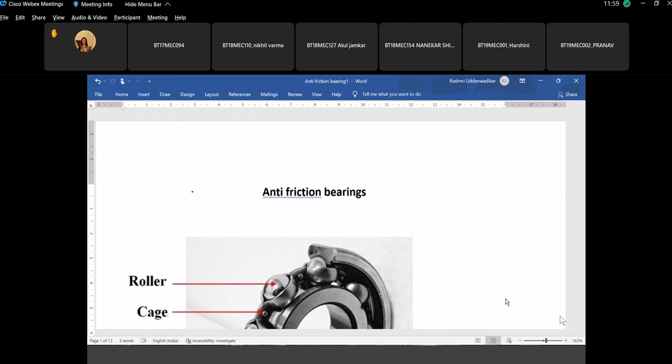My slides are visible and this image is clearly visible to you all, right? Yes or no? Okay, so you can see an assembly of a ball bearing where there's an inner race and then there's an outer race.

Between these two races, there are rollers, and the rollers are not free to move in all possible directions, but are only allowed to roll. The two balls or rollers are not in direct contact with each other, but instead they are placed inside the cage, as you can see. This cage is also known as a separator, which avoids the contact of ball to ball or roller to roller.

All these rollers have a mirror finish, so they are highly smooth with a very high level of surface finish. We call this mirror surface finish. Since we are looking for absolutely no friction, which is not possible, but minimum possible friction, we also call these bearings anti-friction bearings.

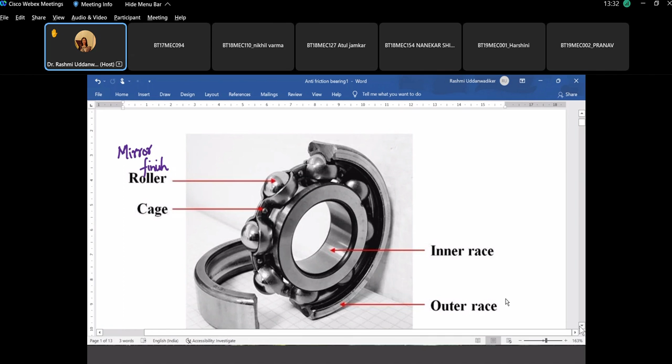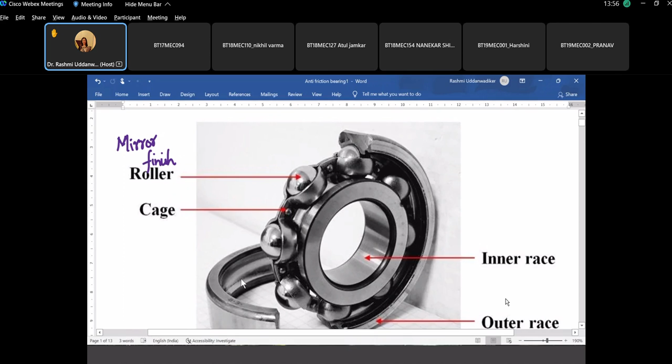Are these grooves visible to you, on the inner surface of the outer race and likewise the outer surface of the inner race? What is the shape of the groove that you can see? So here these grooves are in the form of an arch, curvilinear, or in the form of a curve.

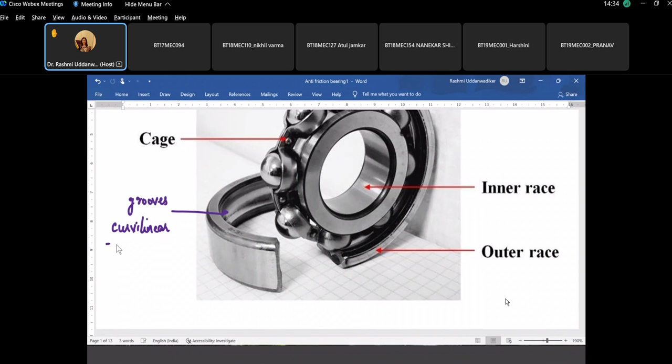It's not a flat surface. And because of the curvilinear grooves, it is allowing a larger contact area, permitting a larger area of contact. What happens when the area of contact improves or increases? Why are we trying to increase this contact area here?

To decrease the stress. Since the strength is known, this is the maximum stress it can withstand, so this will permit larger loads to be transferred. This permits larger or heavier loads because the stress would be less. For the same amount of load, if the area of contact is small, then the stresses would be too high.

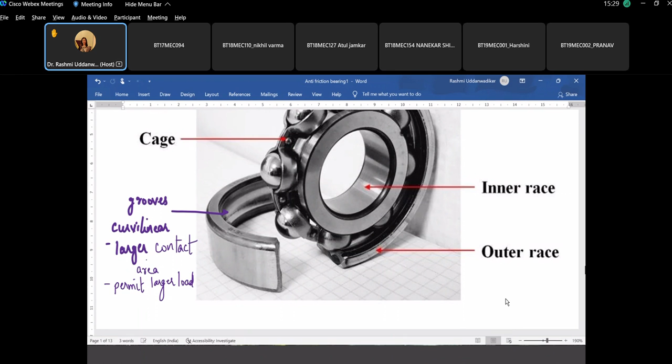The radius of the groove is different from the radius of the ball, and which one do you think would be greater? So yes, you are right, the radius of the groove is larger than the radius of the ball. And the reason, why so?

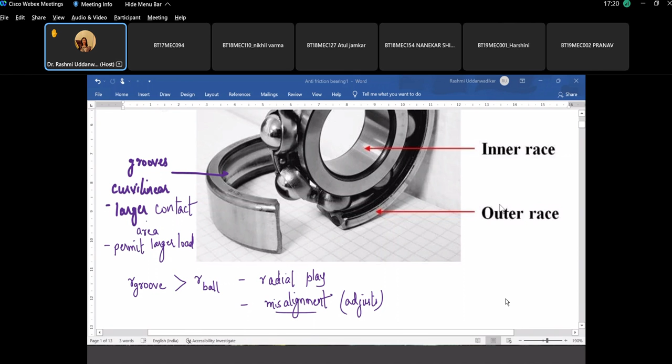Yes, it is allowing little clearance, allowing for some play, so there is a radial play, and the ball can roll. This is allowing a little amount of radial play. Plus, the outer race is in contact with one rotating part, and the inner race is in contact with another shaft. So if there is a slight amount of misalignment, this play or difference between the radii will take into account that little amount of misalignment. So it accounts for or adjusts the misalignment between the two rotating parts. That is another advantage of having a larger groove radius as compared to the radius of the ball.

As shown in the figure, this is the simplest kind of deep groove ball bearing. Now we are talking about various types of ball bearing, roller bearing, and then we'll compare a journal bearing and a ball bearing, and what are the advantages of one over the other.

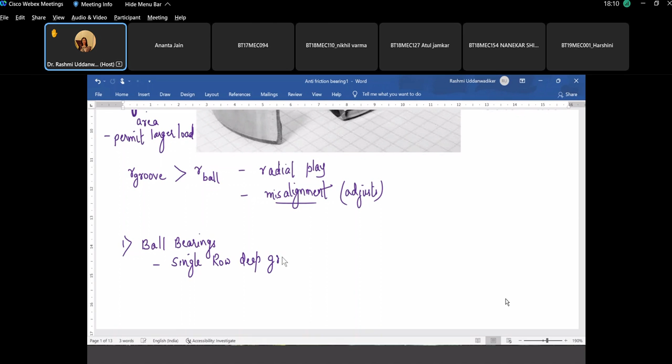So there are different types of ball bearing. The most commonly used, shown in the picture above, is a single row deep groove ball bearing. We'll again be referring to the design data books because a lot of data is given in the PSG design data book for different types of ball bearing. The most commonly used ball bearing is normally designed to take radial loads, load coming along the radius of the shaft. It can also take axial load to some extent, but only when these axial loads are smaller than the radial load.

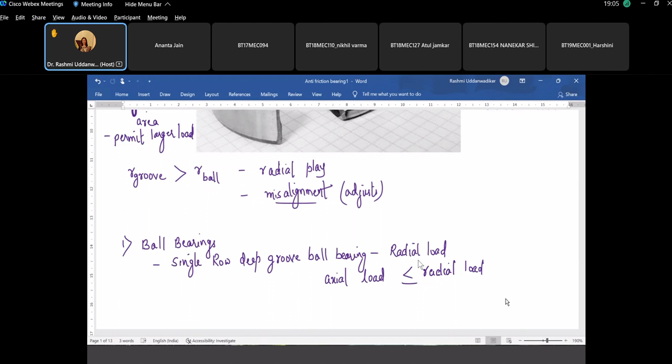If they're equal to radial load, or the axial load is greater than the radial load, then we have to go for other type of ball bearing. But this single row deep groove ball bearing, as shown in this image, is used essentially for radial loads.

What if the axial load is greater than the radial load? If the axial load happens to be greater than or equal to radial load, then we go for a different type of ball bearing known as angular contact ball bearing.

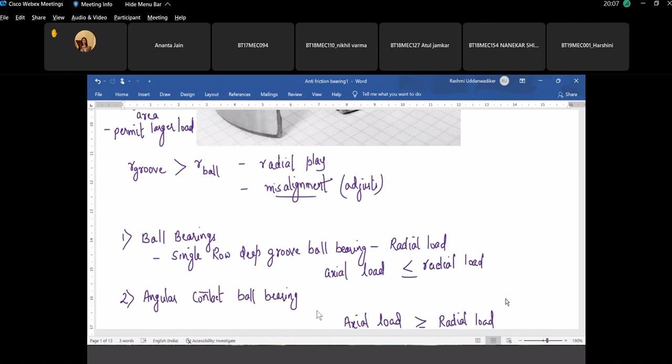So these are designed for larger axial loads. Why so? It is because of its design. Yes, I have the image. This is the angular contact ball bearing.

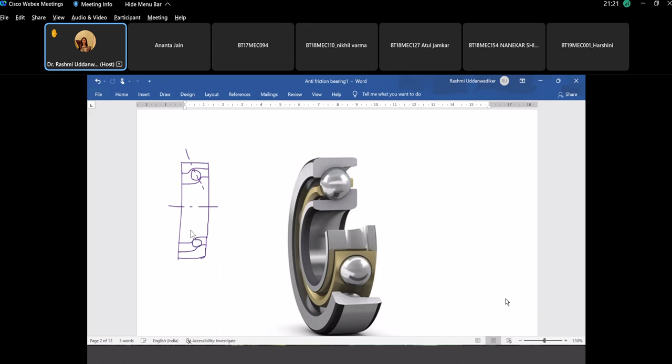And how is this different? If I draw a side view of this bearing, the grooves are cut like this, and the ball is placed here, and the line of contact is something like this. Similarly, on the other side again, the grooves are like this. This is the line of contact, here you can see this. This is known as the line of contact.

So it's because of its design that this can take the axial load and this can take the radial load both, this being the line of contact. So the resultant happens to be somewhere close to this line of contact, because of which it can sustain both kinds of load.

Now depending upon our assembly, we have to select the type of bearing. If it is only radial load, pure radial load, we can go with deep groove ball bearing. If there are axial loads much less than radial load, we can still go with deep groove ball bearing. But if we find that the axial load is coming out to be greater than radial load, we have to go with this angular contact ball bearing.

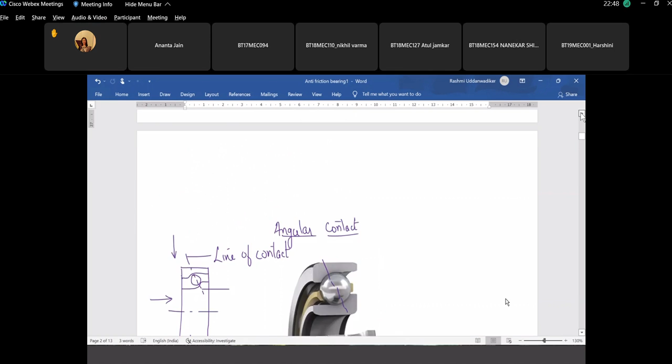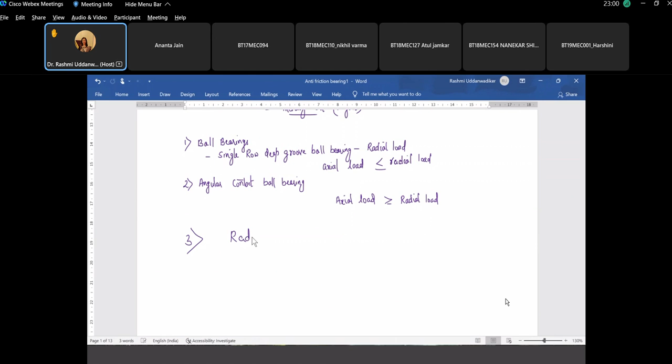Again, a ball, a little modification in a single row deep groove ball bearing is needed if the radial loads are very high, large, or heavy. A single row of ball bearing might not be sufficient to withstand the load.

There we use a double row deep groove ball bearing. The design data book gives us all the details of how much is the load carrying capacity for a single row deep groove ball bearing, double row deep groove ball bearing, and depending upon the dimensions, the data, the radius, and all those details.

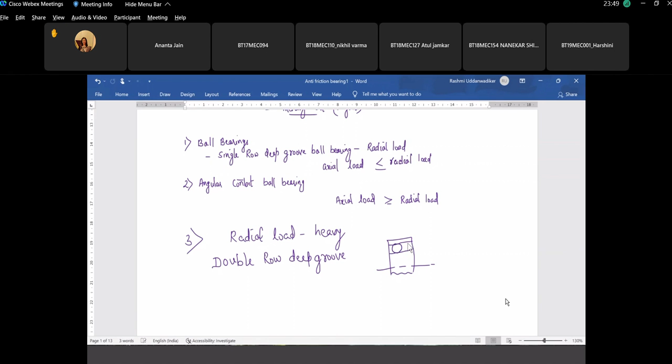So instead of a single row, there will be 2 rows of ball bearing. This is known as a double row deep groove ball bearing because this will allow larger radial loads to be withstood.

So if there are machines with lots of vibrations, in factories and industries, with heavy vibration and a lot of load coming in multi-axial direction, there's a chance that the shaft is continuously getting misaligned. You know what is the meaning of alignment or misalignment?

If this is one shaft, and if this is another shaft, you cannot have a shaft of infinite length. So somewhere you have to couple these two shafts. So couplings are used. I'm sure you have studied about the couplings in machine drawing.

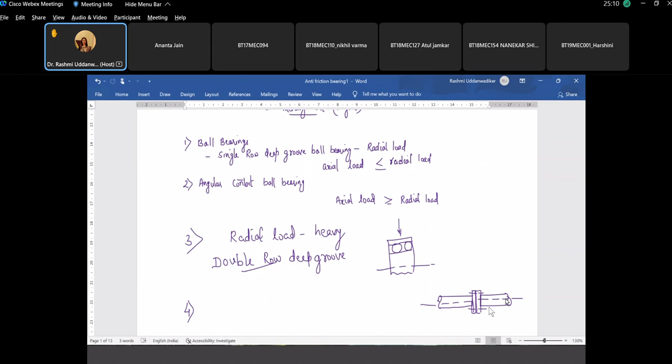Have you studied about couplings in machine drawing? Otherwise we'll have to quickly go through the types of couplings. Remind me after this topic, anti-friction bearing, we'll talk about different types of couplings. So you haven't studied, right, machine drawing? Have you, Prajwal? Have you studied about machine couplings, different types of couplings? A little bit. Okay, okay, so we need to cover this topic again here.

So a misalignment in the shaft is: if both these shafts must have their axes coinciding ideally. If one of the shafts, now this is an exaggerated view, is having this kind of alignment, and this is another shaft with this kind of alignment, this will lead to heavy vibrations and shocks because of the misalignment.

The misalignment can be in the angular plane, horizontal plane, or vertical plane. If one shaft is slightly above another, this is one shaft and this is another shaft, these are also misaligned vertically. Likewise, on the horizontal plane, if I look from the front I see they are perfectly aligned, but when I see from the top, I see that the axes are not coinciding, not coaxial. So there can be vertical misalignment, horizontal misalignment, or angular misalignment.

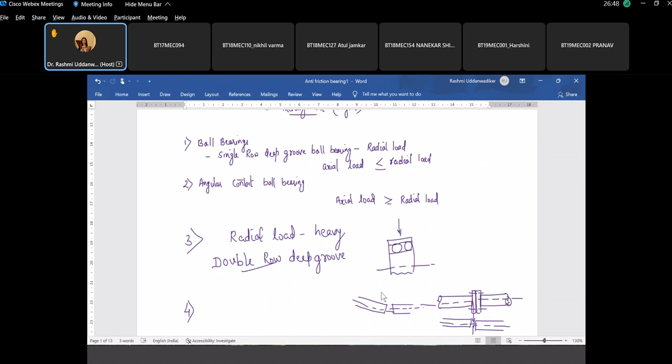So any kind of misalignment will lead to very heavy shocks, vibrations, stresses, and ultimately failure of the machine. So normally we either use universal coupling, which can take a little misalignment into consideration, or if a measured amount of misalignment is there, then Oldham coupling is used.

You remember having studied Oldham coupling in theory of machines? Saurabh? Sarthak?

Harshini? Why is no one answering? You haven't studied about Oldham coupling? Yeah, double slider crank, third inversion. Are you sure you have not studied Oldham coupling? Vaishnavi? Yes, no, yes you have studied. Or yes, not studied, you have studied. Okay, you're done, so that will also take into account. Studied but forgotten - oh that's a wonderful answer. That's a rather truthful answer.

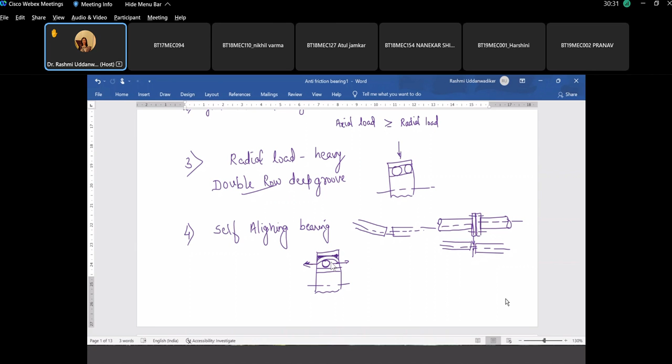The image for this - yeah, this is a double row deep groove ball bearing, as I was telling you. For larger loads, for heavier loads, we need 2 rows of ball bearing, which can take the heavier radial loads.

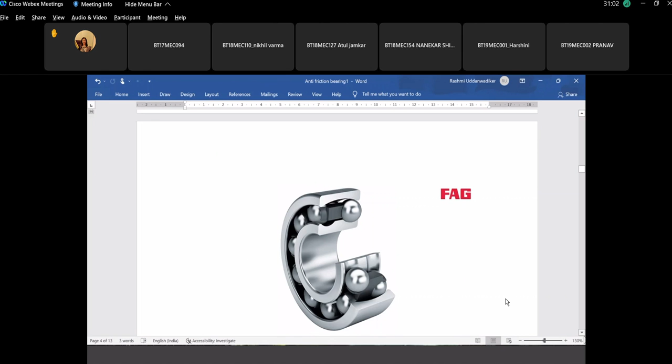Yeah, this is about the double row self-aligning bearings. So you can see there are 2 rows of rollers, and these rollers or balls are placed in a zigzag fashion. So if one ball is here, another ball is here, and the third one is here. So they are placed in a zigzag fashion.

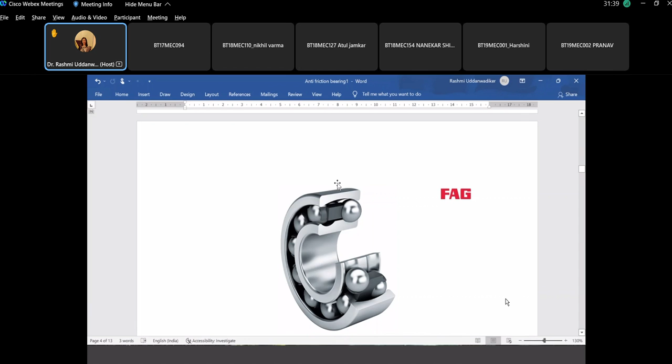And here there is a curvature given over here, and this curvature will allow the ball to slightly move from this position to this position. So this also accounts for heavier weights, heavier loads, and for little misalignment - that is also taken care of. This is the self-aligned bearing.

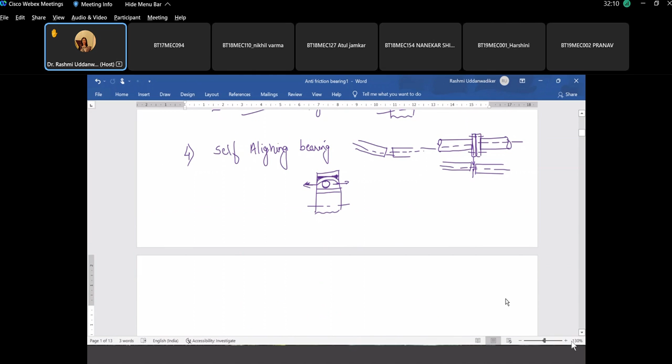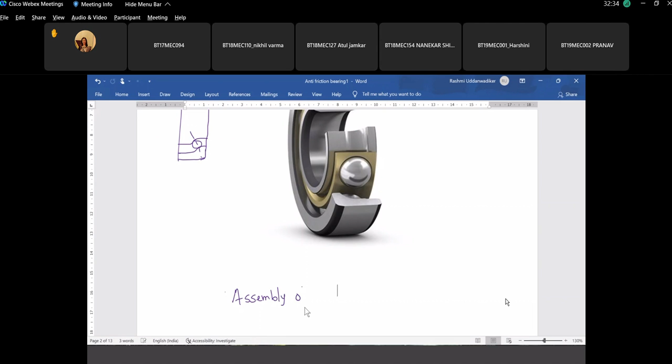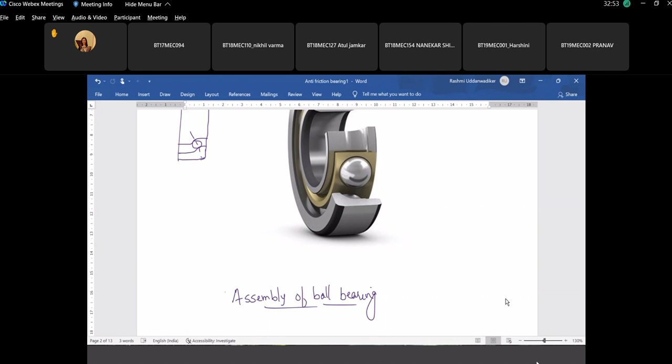Now let's talk about how these are assembled. Do you know how these ball bearings are assembled? Anyone knows about the assembly of the ball bearing? Anybody?

No, okay. So the first kind of assembly is known as a Conrad type assembly. And this is when there is an outer race and then there's an inner race, and this inner race is shifted here. So the inner race is eccentrically placed and we have a number of balls to be inserted here, all of the same size.

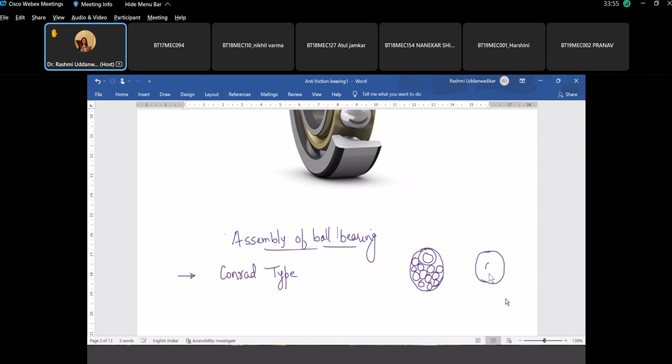And then since these balls are very smooth, they are moved so that this inner race comes in between, and the outer race is outside, so that all the balls or rollers form in a line. So this is a Conrad type of assembly.

And another kind of assembly is known as the filling notch assembly. A filling notch assembly has the bearing, and in this bearing there is a notch provided only in one particular area or sector of that, and the rest of the notches are as usual.

So there is a notch provided and all the balls are inserted only through this notch. This is slightly oversized so that the balls can be easily inserted and they go on inside through this particular notch. Suppose here there is this enlarged notch, so balls are allowed to enter from here and then they are placed at their locations.

And then this filling notch has to be sealed later so that the balls do not come out of it.

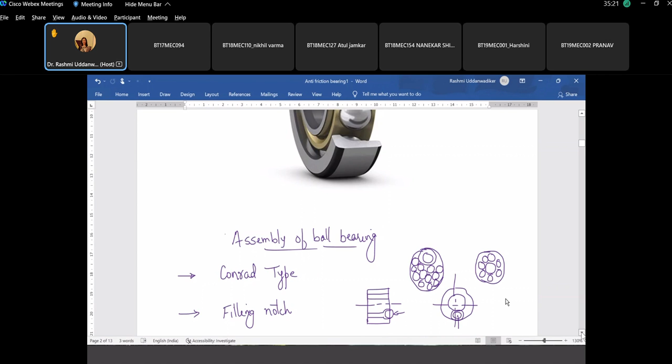So the advantage of this filling notch assembly is more number of balls can be placed as compared to the Conrad type. In the Conrad type of assembly, you have to leave some space - if this is tightly packed, then your inner race will not move and come in between. So you have to give enough space so that they align themselves, fall in line in this concentric pattern, and allow the inner race to come in between. But here, every time a ball is inserted, it is placed wherever it has to go, and it can accommodate more balls compared to the Conrad type of assembly.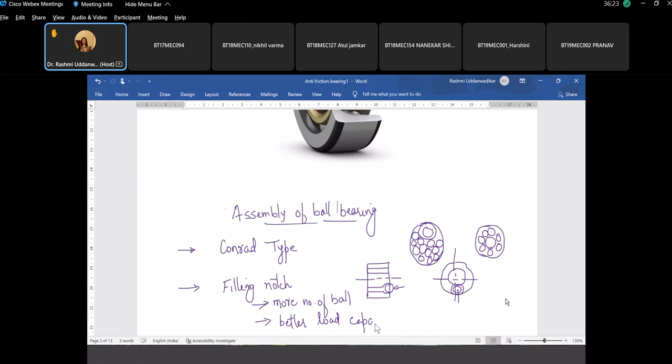And another advantage is, compared to Conrad type, this one has a better load carrying capacity. Again, this has been observed with statistics or with experimentation that this can take more load.

But this has one disadvantage. Can you point out what would be the disadvantage here? So there are two advantages of filling notch type of assembly over the Conrad type of assembly, but then there is one limitation.

Can you guess? Stress at the notch? No, lower strength at the notch? Not exactly. Any more guesses? Shifting of what? Ventilation, center of mass? No, no, no.

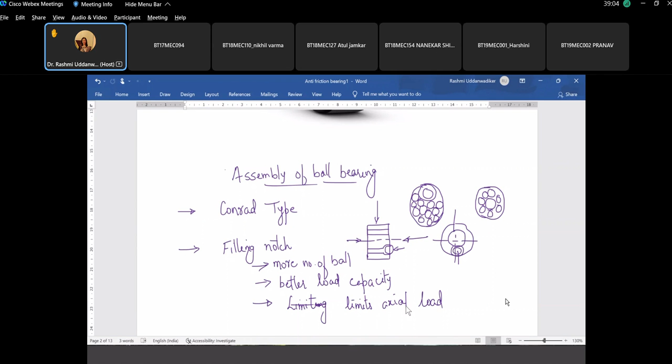Since the balls are placed along this axis, if there is a load coming in the axial direction, in whatever direction, there's a chance that the locking thing given in the filling notch might break and the balls might start coming out. So that limits the axial load. So if you are designing or using a bearing for radial as well as axial load, then you have to go with the Conrad type of assembly.

These are the textbook methods of assembly of ball bearing. I'm sure these days there would be newer and newer methods of assembling the ball bearing. Every time a new technique comes in the market, it is patented, and so it is not publicly available many a times about the new ways and new techniques. Yes?

Yeah, somebody is asking something.

So, what is the basis for deciding what bearing should be selected? What should be the size of the groove or how much load it can take? So normally there are two governing parameters: the type of the bearing that is used, whether it is single row or double row, self-aligning, or angular contact. The shape of the groove, the size of the groove, and the type of bearing will decide what should be the direction of the load.

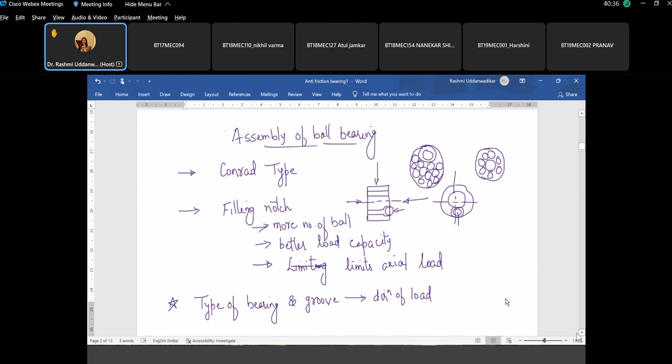Direction of the load, when we say it is axial or radial, or ratio of axial and radial. And the load carrying capacity is dependent upon the size of the ball. So we have different ratings on nomenclature for the ball bearings, and depending upon the size of the ball, accordingly we have the load carrying capacity of a bearing.

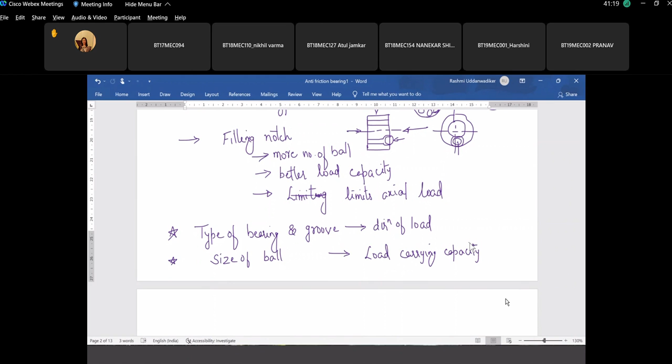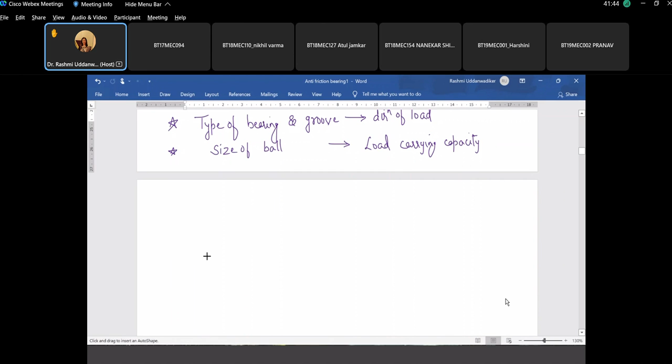So we'll quickly see what is the nomenclature for ball bearing, and then we'll talk about why there is a limitation to the load carrying capacity, or what happens if there is more load. So let's talk about bearing designation. Please draw along with me. I'm drawing a shaft.

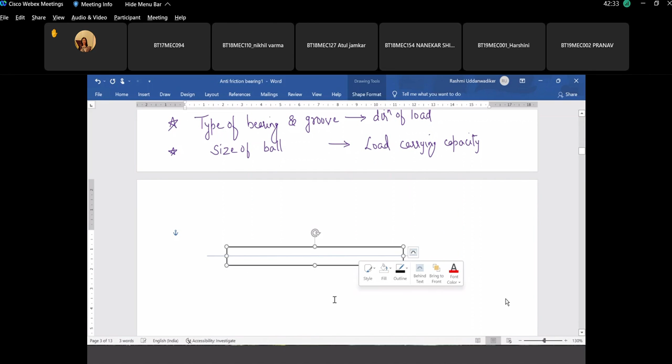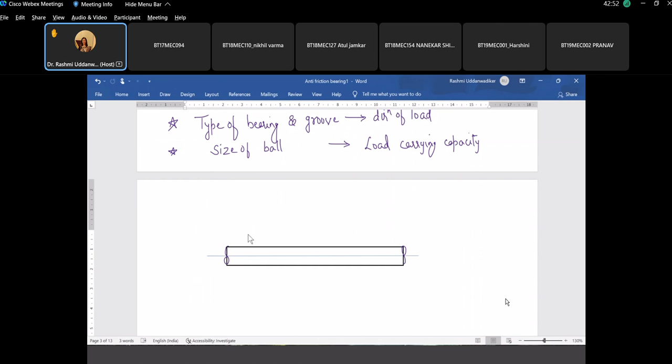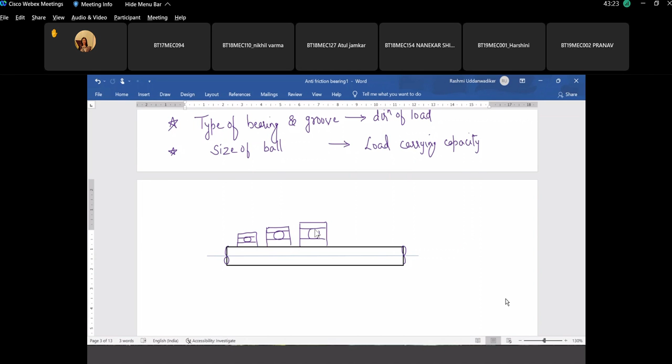If this is my shaft, circular ends. There are 3 series of bearings depending upon the size and the diameter. I go on increasing the size, the height, and the diameter of the balls and the outer race. The inner race, inner diameter is the same, which means the bore diameter or the shaft diameter is the same.

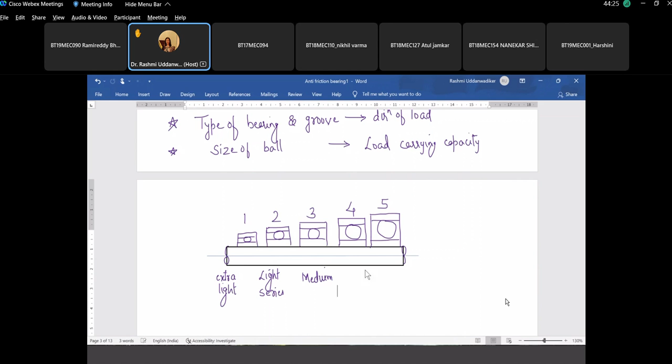This is 1, 2, 3, 4, and 5. One is extra light series. 2 is light series. 3 is medium. What is 4? Heavy. And what is 5? Extra heavy.

So what do you mean by light or heavy? What is light or what is heavy here? Ajinkya, Manish, Ambika, what do you understand with the term light, medium, or heavy? Load and weight, yes. So it's load taking capacity or the load carrying capacity.

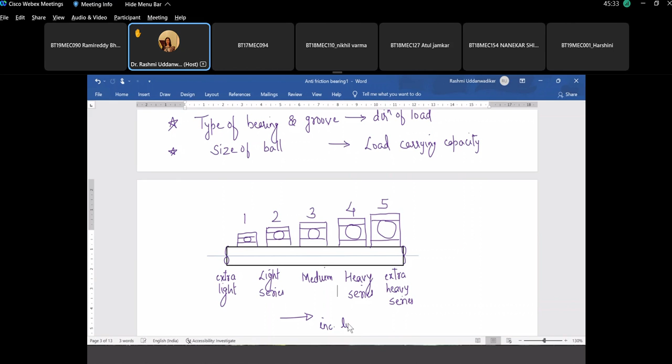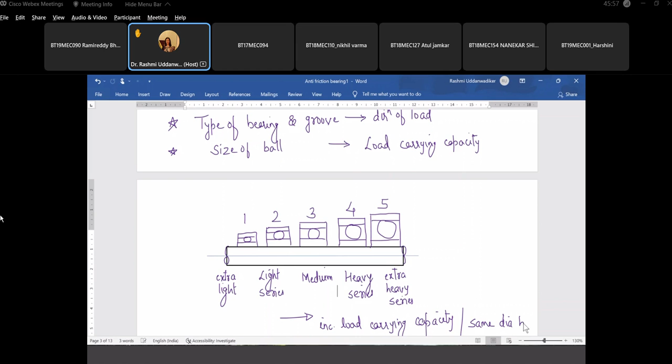So from 1 to 5, the load carrying capacity is increasing. This is in the order of increasing load carrying capacity. The shaft diameter is same for all of them. Look at this, the shaft diameter is same, and so it is drawn or presented like this. Same bore diameter. So as the bore size changes, this will again change. So here we are comparing it for the same bore diameter. This is extra light, light, medium, heavy, and extra heavy.

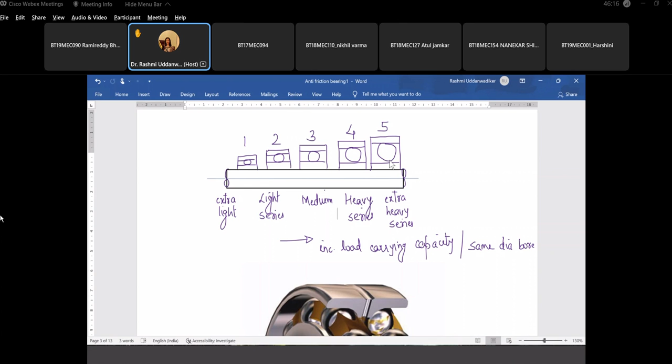So a bearing would be designated like 0-2-1-4, or 1-3-1-5, something like this. So there is always a 4-digit designation. And what is the meaning of this, the 1, 2, 3, and 4? So the first one, like 0, is indicating deep groove ball bearing. 1 or 2 might be indicating a roller ball bearing, or 3 might be indicating an angular contact ball bearing. So different standards will have different coding for this ball bearing.

So in the PSG design data book, when we are following AFBMA, which is Anti-Friction Bearing Manufacturers Association, the coding is different. If you try to follow ASME, the coding would be different. Depending upon which data book we are referring to, they will mention what code they are using.

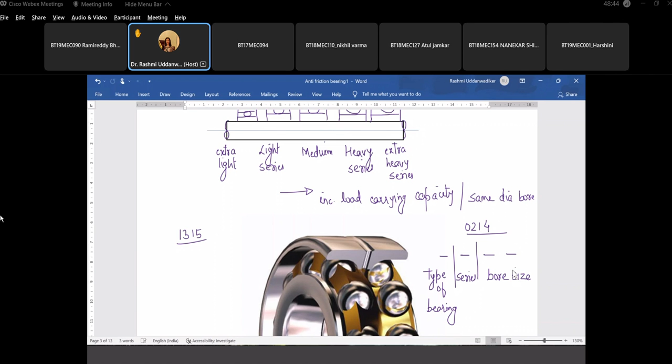Now the size of the bore and the diameter of the bore have a relationship. Design data book will normally give you the size of the bore. If the size is given as 0, 0, it means the diameter of the shaft is 10 mm. You will rarely have a shaft of diameter less than 10 mm. If the size of the bore is 0, 1, then the shaft diameter is 12 mm.

For 0, 2 and 0, 3, this is 15 mm and 17 mm bore diameter. And the size 0, 4 onwards, if it is 0, 4, then it is size multiplied by 5, this much in mm. So for 0, 4, the diameter is 20.

For 0, 5, what will be the diameter? 25. For 0, 6, it would be 30 mm. Likewise, after this, with change in the bore size, the diameter increases by 5. So 0, 0, 0, 1, 0, 2, 0, 3, this is 10, 12, 15, 17. And from size 0, 4 onwards, we get the diameter of the shaft or the bore, which is size multiplied by 5.

So if I am giving you a rating 0215, where 0 is indicating a single row deep groove ball bearing, what is the meaning of 2? This is which series? What do you mean by 2? This is light series. And what do you mean by 15? What is the diameter? If the size is 15, the diameter is 15 times 5, which is 75 mm. So it is 75 mm bore diameter, light series, deep groove ball bearing.

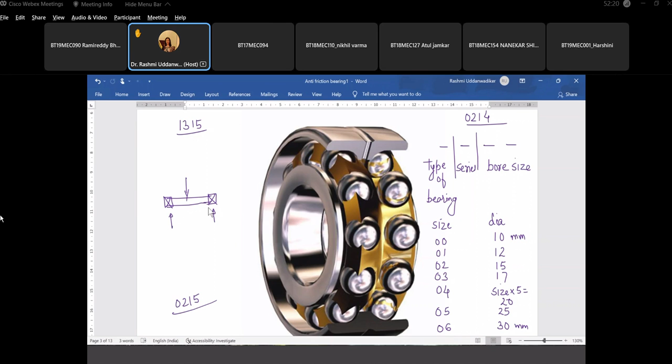So what happens if it is loaded heavily? Suppose the load coming is more than the load it is subjected to. This would be subjected to contact stresses. What is the difference between compressive stress and contact stress? Another important question for interviews: the difference between contact stresses and compressive stress.

Anybody can tell me? Collision? No, collision will lead to impact. Ujjwal, Aditya, Richa.

Anybody can tell me what is the difference between contact stress and compressive stress? Impulsive stress in contact. Impulsive is from the term impulse, coming for a short period of time. Is this what you mean to say, Prajwal?

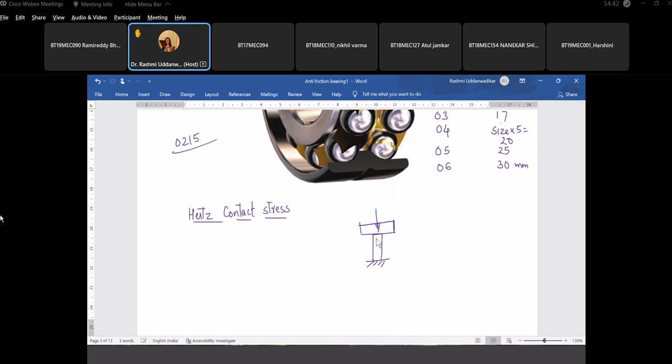Okay, yeah, localized stress is correct. Continuously applied, like stress applied by the road on the tire. Yes, okay. So a compressive stress is, this is the column and this is subjected to a continuous load. Whatever this load might be, because of some beam, a heavy beam over this, this is causing a compressive stress.

Static compressive stress. A contact stress is, this is a good example, like the stress applied by the road on the tire, where this tire is in contact with the road for this particular area of the tire for a small moment of time. And since this is continuously rolling, next time the contact stress would emerge here, next time here, and then here, and then here. Likewise, all these balls and rollers placed inside the races, when they come in contact with the inner race or the outer race, the type of stress that comes into picture is known as contact stress.

A detailed study of this contact stress was done by Hertz, so we call this Hertz contact stress. For the bearing, this is the outer race and this is the inner race. When a ball is here, the maximum amount of contact stress will occur a little inside its circumference, not exactly at the surface, but radially inwards towards the center.

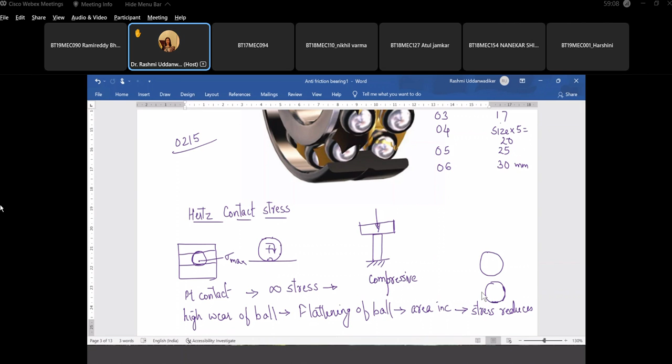So when it's very new, there is high wear and tear, and the moment it becomes flattened, because the area increases for the same amount of load, the stress reduces, and further wearing or flattening will stop. If this ball has to fail, a crack develops, initially in the region of maximum stress. The crack develops here and nothing is seen on the surface. Gradually this crack comes to the surface, and gradually this takes a lot of time.

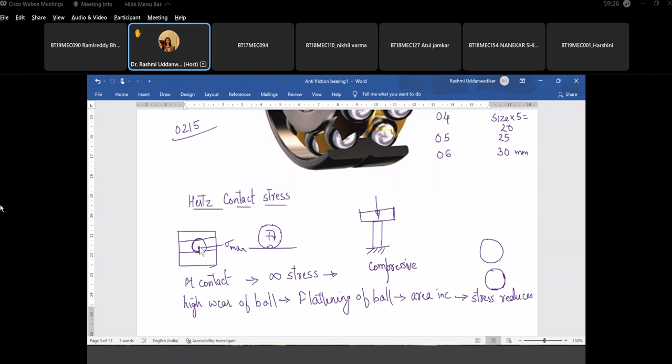So if I again exaggerate this, this is known as crack propagation. This crack will start propagating towards the surface. So the crack starts from a deeper surface, it doesn't start from the outermost surface. The crack would appear at the surface little inside the outermost surface. This is how it would normally fail, and the moment a crack appears here, it has to be completely replaced.

To avoid this, since we know it will develop a crack below its surface, how do we avoid this? Case hardening is done. Case hardening is where only the outer surface of this ball, just the outer case thickness, is hardened. So normally case hardened chrome steel is the material used for balls and rollers. Next class we'll talk about roller bearing.

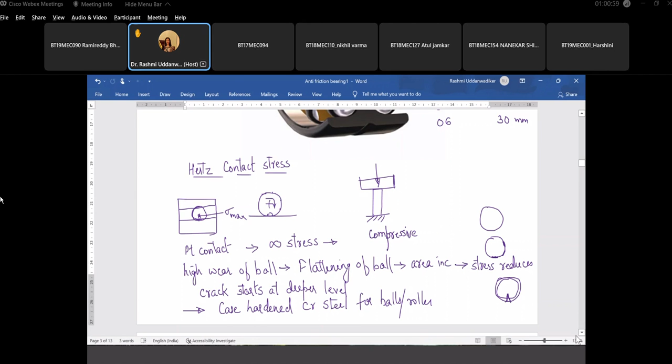So it's a case hardened chromium steel which is used for the material. A lot of heat treatment is given to improve the strength and improve the hardness. This is improved with heat treatment.

All these ball bearings are designed for a finite life, and the life is always given in number of cycles, number of revolutions. While designing, we'll discuss in the next class how we find out the life of a bearing. The life of the bearing depends upon two parameters: the speed at which it rotates, and number of hours. So from the RPM, we can find out its life in number of hours. This is how the finite life of the bearing is defined.

Next class we'll talk about different types of roller bearing, and find out how the life of the bearing is calculated, what are the different terminologies used for ball bearing and roller bearing, and a few formulas required for designing the ball bearing. Then in coming lectures we'll solve numericals on the ball bearing using both the design data book, BD Shiwalkar, and PSG design data book.